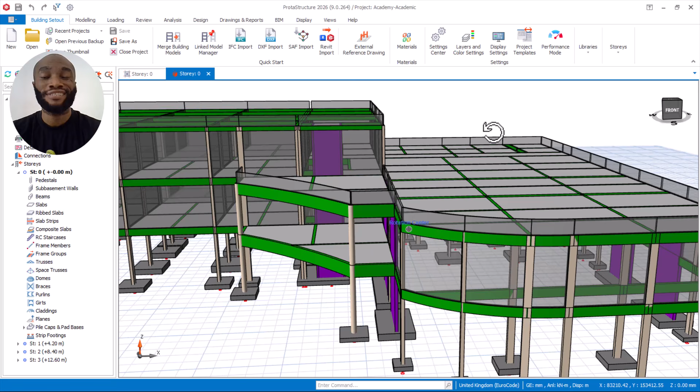Imagine being asked to design a 20-meter beam in reinforced concrete with no intermediate column. And the client and the architect don't want to use steel because of several reasons, the cost and other things. And this has to work. In this video, I'll be showing you the engineering logic, not just the software procedure, but the engineering logic behind every decision on how to design a 20-meter beam using a real-life project which I just designed here.

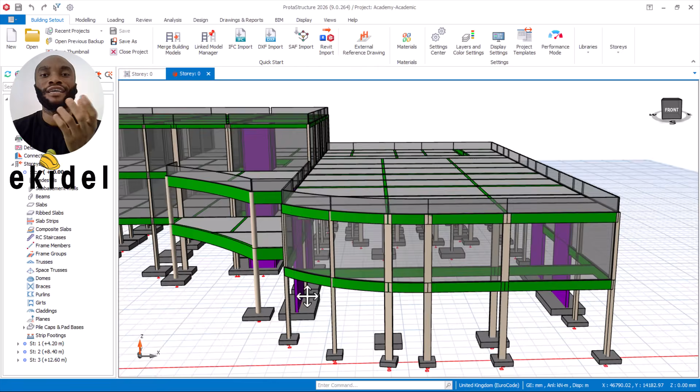My name is Engineer Justice Nwaka, and in this video, you will learn the real engineering concept to design a long span beam, just like this 20-meter beam you are seeing here on my screen. And you will also learn how to make the right engineering judgments on any kind of design in terms of long span beam or short span beam.

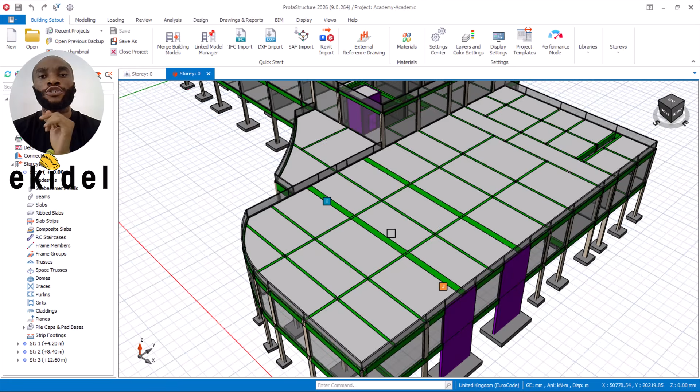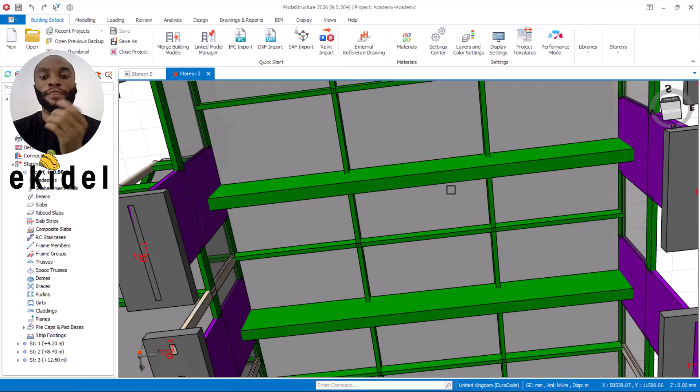And also, following this concept of a long span beam, I'll also show you the right decision for a long span beam of this, either to use a column or a shear wall at the ends of the beam. As you can see, there are two beams of 20.30 meters that I have here. It's a very long span beam without any column at the center or intermediate. And you can see that I used a wall at the ends, which you will know by the end of this video why you must not use a column when you are designing for a long span beam. Instead, it is best to use a shear wall.

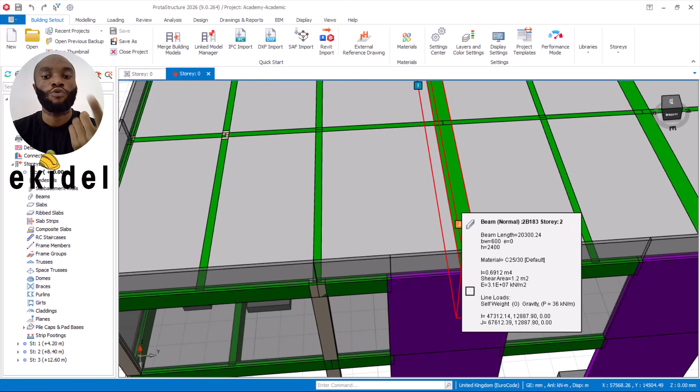Also in this video, I'll show you how the connection or the support between the long span beam and the reinforced concrete wall which you're using as the support are meant to be connected. Because if there is not enough anchorage length between this beam and the reinforced concrete wall, then there will be a split between these joints. I'll also show you the principle on what to do there. So these are the things you will be learning by the end of this video. So stick around and let us begin.

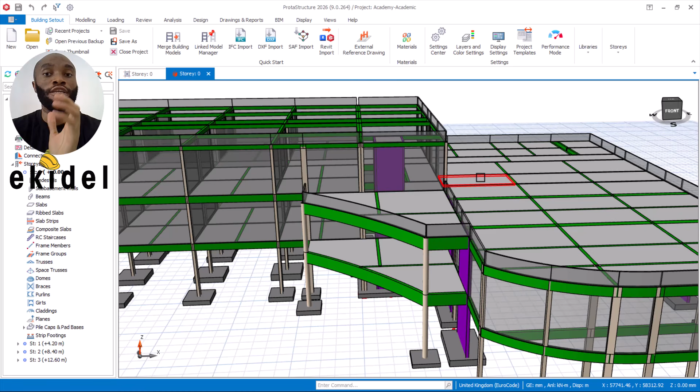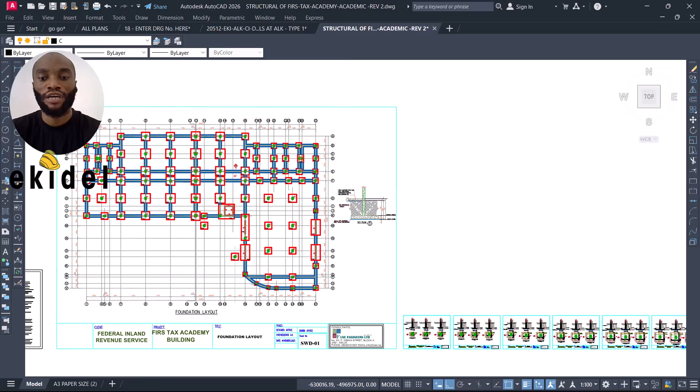Okay, so to dive into this, let me walk you back. This building has already been designed, which you can see the analysis here, and this is a real-life design, which you can see the structural detailing here. You can see the detailing of the foundation, the foundation layout. And then for the first floor, this is the first floor of the beams and column layout. And then all other ones, this is the full detailing. But let us dive back to what we have today, which is the structural design for the long span beam of 20 meters.

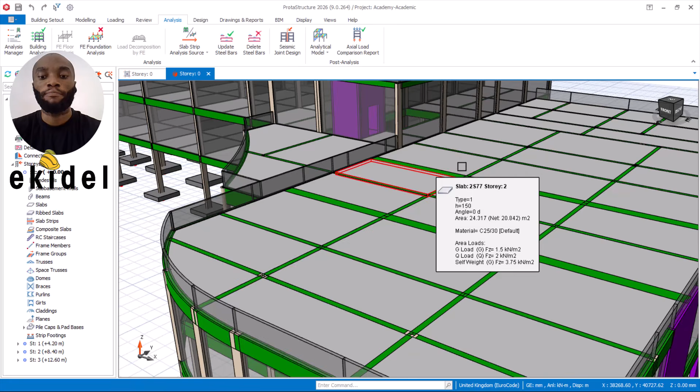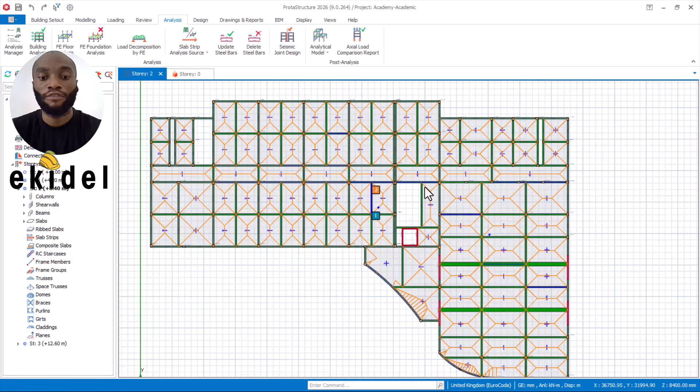Now you can see this is the place where we have the 20.0 meter and 20.3 meter beams, which you can see here. So basically this happened because the client or the architect doesn't want to have any intermediate column. It was first designed to have a column because it is a hall.

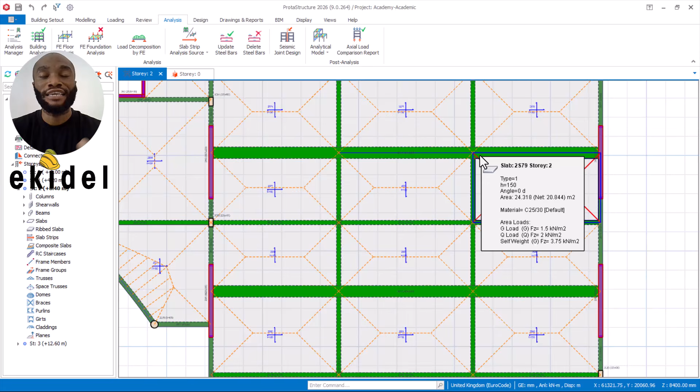This whole area is to be like a conference hall, which you can see here, an open area, and it's a double volume. The height spans through from the ground floor to the next floor up. So it's actually about 8 meters high. Yeah, 8.4 meters high, which you can see here, from the lower ground level.

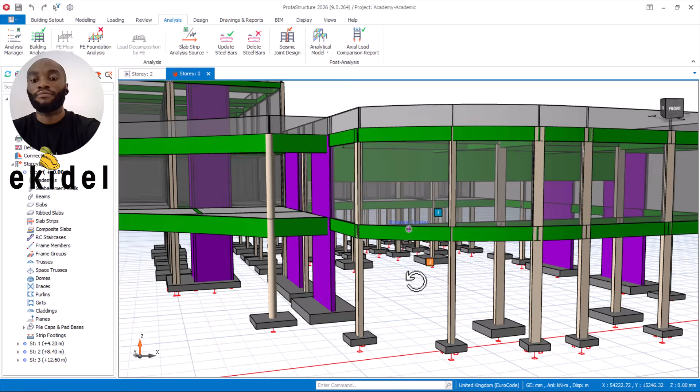So the architect and client don't want intermediate columns. And okay, so let's use steel, which they said no, they want it to be concrete, which is still workable when I looked at it, even if the span is 20 meters. Okay, that is fine. So in that case, I modeled the 20-meter beam.

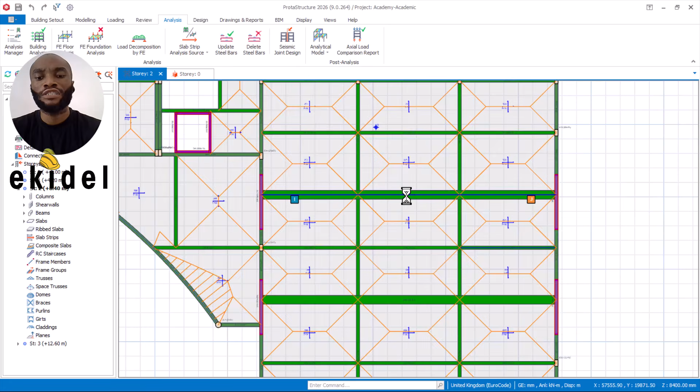Now, what is the concept of modeling the 20-meter beam? Because of the span, what should come to your mind? What will be my section? As you can see, in this case, we are open here now. You can see that I used the beam section size to be width 600 and the

depth 2.4 meters. If I open up this property now, come here and then open up the property here, it shows up just here. Now you can see that the width of my beam is 600 and the depth of my beam is 2.4 meters. Okay,

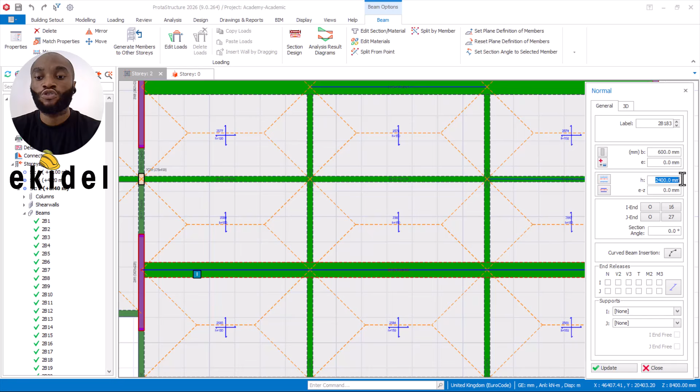and I didn't release the moment. I made it fixed, because I needed the joint to be very rigid and not flexible. Okay, that is fine. So in that case, I didn't apply hinge or pin ends at the ends of the beams. Okay, that is fine. So this is the depth.

Now, based on this depth, how do you assume your depth, or do you just choose any depth you want? No, you don't just choose any depth that you want. First, you have to follow the rule of thumb when it comes to beam depth. And what's the rule of thumb for the beam depth? Let me just close this other one here first. So the rule of thumb for the beam depth is very simple.

Span, that's L over 12 or L over 15. That gives you a guide on how to assume the depth of your beam. Now, note that this thumb rule only gives you the depth based on the span and not based on the load. So if I do L over 12 or L over 15, that gives me what? That gives me 20,300. That's the span of the beam, which is L, divided by 12.

That gives me almost 1.7 meters depth of beam. If I do L over 15, that is 20,300 all over 15. This is the thumb rule. That gives me almost 1.4. So that means that my depth of beam, based on the thumb rule, is meant to be assumed 1.4 to 1.7 approximately. Okay, that is fine.

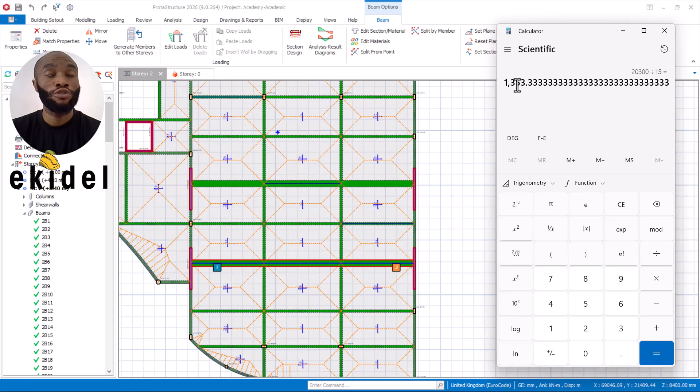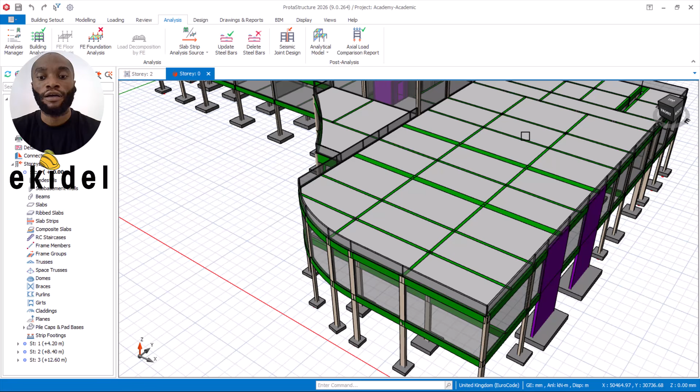Now these values are based on what? Based on the thumb rule, without the loading. Now, if you notice, we have a slab here. The top of the slab here is to be used for a restaurant. So by the time you factor all the loads of this area of the slab and everything, that is why my depth of beam changed from 1.7, which was the assumed depth, to

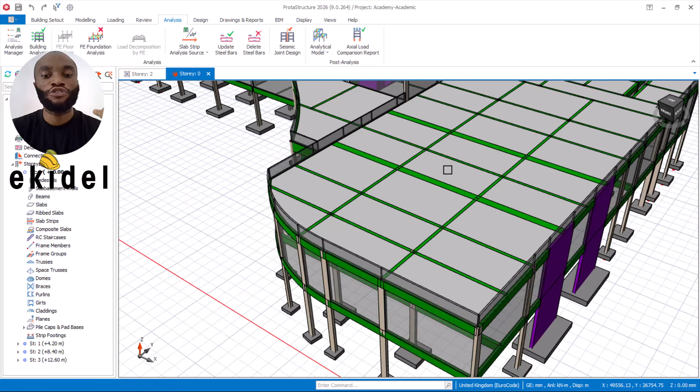2.4 meters. Now, note that depth of beam of L over 12 or L over 15 is not your actual depth. That's only a thumb rule. What governs is after your design: what is the depth that satisfies the design? So in this case, 2.4 depth satisfies the design.

Now, why did I use 600 as the width of my beam? If you open here, you can see I used 600 as my beam width. I used this because, knowing that this is a long span beam, the number of reinforcement bars to expect will be much. They won't be, let me say, 4T25 or 4T16 order. I'll be expecting something like 6 to 7 to even 10 to 11 T25.

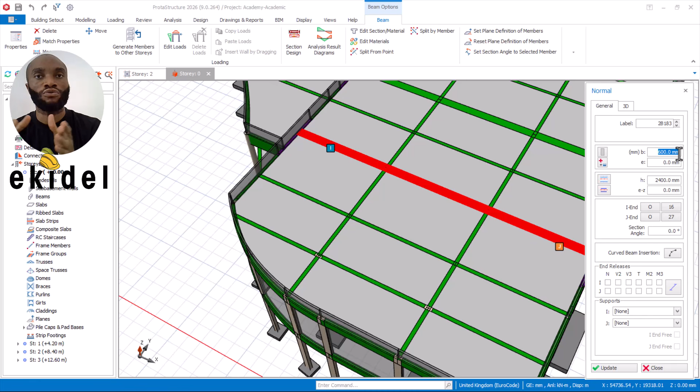So in that case, I need enough width so that those bars will not be clustered together like this. They won't be clustered; they should be spaced. Else, if they are clustered, concrete cannot pass through when they are casting it. So if concrete cannot pass through when they are casting it, after casting, under the beam will be left with void.

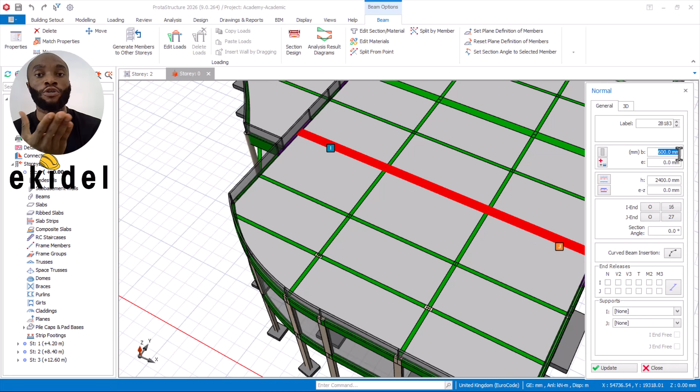And when there is void, there will be what? Air. And when there is air, there is what? Oxygen. And when there is oxygen, what happens? It will cause rusting to the reinforcement over time. It can take 5 years, 10 years, but it will rust because there is oxygen present inside the beam, because of the void. So just to avoid that issue, I have to give enough width of the beam.

Okay, that is fine. Then let's now proceed, because I've already done the structural analysis, which I believe you already know how to model if you've been with us on the channel. The same way you model your building, just model using the same principle. Now if you move to the beam design for this, if I open this one and then open the section design, we first go to the shear force and the moment value, which we displayed just now.

Now, this is the final rebar arrangement that we used for the real life construction of it. Before we look at this, let us look at the shear force and BM diagram. So we open here, and you will see the massive value over 6,000 kilonewton-meter for the bending moment. Sorry, bending moment value.

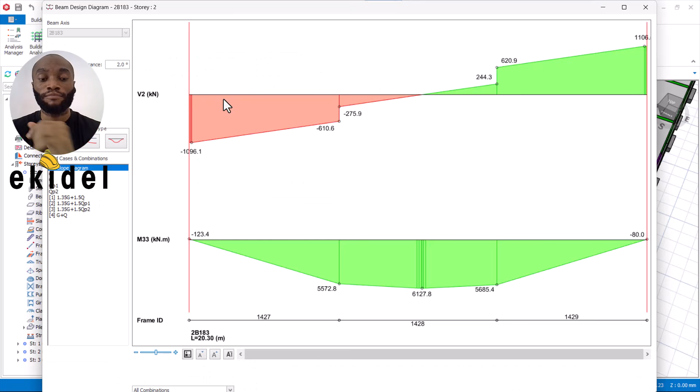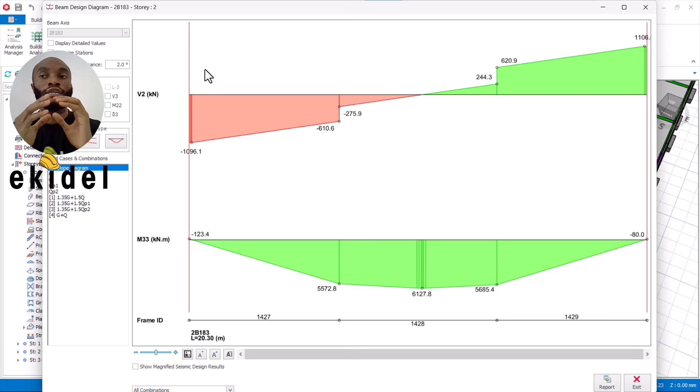Now this is the shear force here at the top, which takes care of the links. It tells you the links you're going to provide, so that there won't be any bursting of the beam. Else, if the ties, the links or the stirrups are not sufficient, it will burst. Understand? So this shear force gives you the links. Now this is the BM diagram, as you can see.

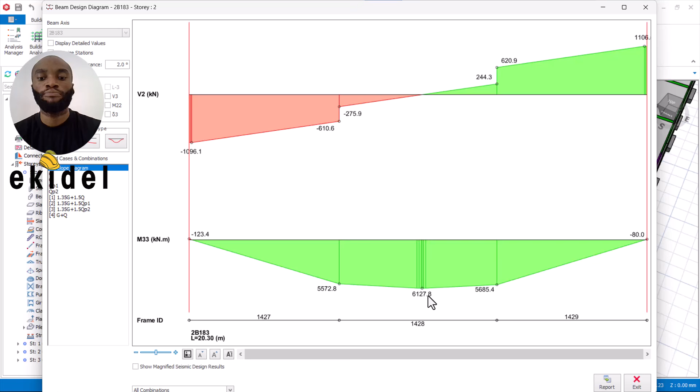Now you can see the moment at the supports at the ends, this and then this. And then you can see the maximum moment, which is at the span, 6,127.8 kilonewton-meter. So this is a very high moment, and it is what one should expect for a long span beam of 20 meters. Okay, that is fine.

Now coming to the reinforcement arrangement, you can see the reinforcement that I used, 25 millimeter. So at the top 5T25, although this will be justified based on your design. For example, if I reduce this down to 4, you can see that it is failing. So I'll increase to what is sufficient, in this case 5. I don't want to use lower reinforcement.

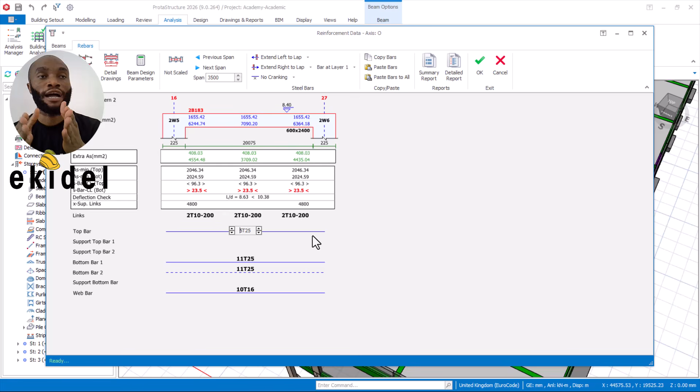Now, one simple trick: when you have a long span beam, don't use lower diameters of reinforcement. Once your beam span is from 8 meters and above, or from 9 meters and above, don't use smaller diameters like 16 diameter, 20. Even if it's okay, don't use it. Instead, change it to 25 diameter. Use fewer bars of 25 instead of using so many lower diameters of 16 and 20.

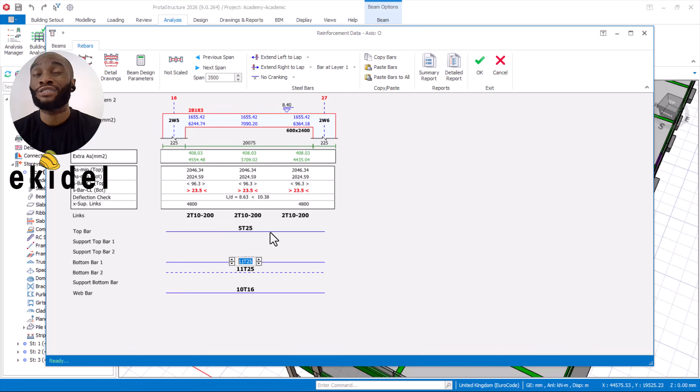Because of the length and the deflection, and you know that if a bar has a smaller diameter, it will deflect more compared to one that has a bigger diameter. So I use 25. I don't want to use 32 diameter because of the cost, because even when designing, you also consider the cost. So since this 25 is okay, I make my minimum 25 for every long span beam from 10 meters, 13 meters, 14 meters and above. Now, you can see the bottom reinforcement.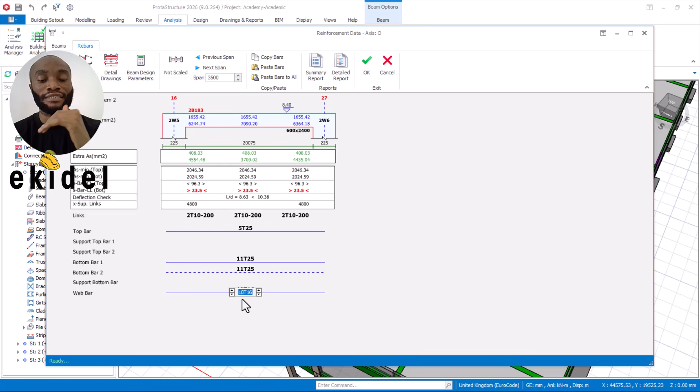I have 11 T25 on the main bottom reinforcement, and then again I also have 11 for bottom layer 2, which I'll show you on the reinforcement how this is being placed. Okay, that is fine. This is the link. This now is called the sidebar. That's the web. It's called the sidebar. Because of the depth of 2.4 meters, there should be sidebars. So 10 numbers of sidebars needed.

Okay, that is fine. Now this is a link. Because of the high shear force value, one leg of link is no longer sufficient, so it will be a doubled link. No more one leg, it will be a doubled link. So you can see now it has doubled links. If you reduce that, it's going to cause an issue of failure, but you just make it to be 2 because of the doubled link. So I put double link.

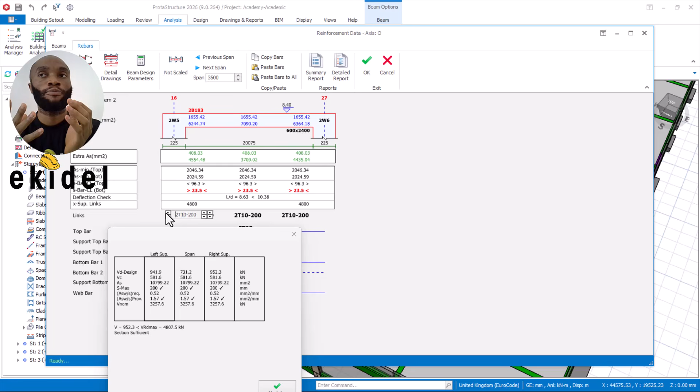Most times there are some beams that will require 3, because when you give fewer links, what happens if it's not sufficient? It will burst. It will sway and burst. That's fine. So in that case, also control your spacing. Always control your spacing, knowing that the maximum link spacing is 300, but don't always go to that 300.

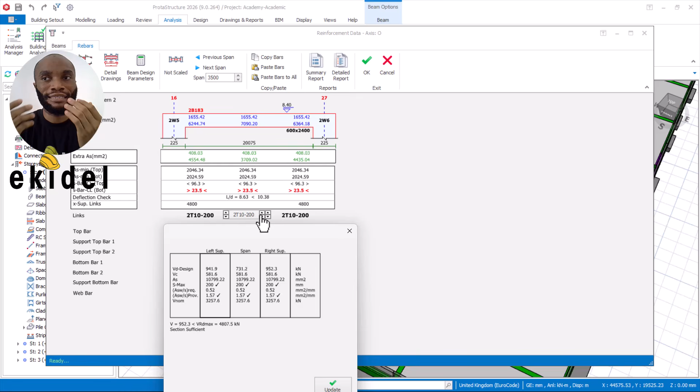Control yourself at 250 and below, because in Africa, most times the people that measure those spacings, you might give them 250, they'll be giving you 270. So if you give them 300, which is the maximum spacing, they will be giving you 310, 320, and most times the engineer on site might have too many beams to check and just overlook it. Although this kind of beam is very critical, so there must be a critical check, but even in that, still keep the principle: don't use the maximum, which is 300, try to come back to 200, 250.

So that if you give them 200, even if the design was okay for 300 spacing, and you give them 200 or 250, most times they might give you 270, 230, which is still within the safe zone, right? Not more than the maximum link spacing. That's fine. So I use mine to be 200. Okay, that's my own culture.

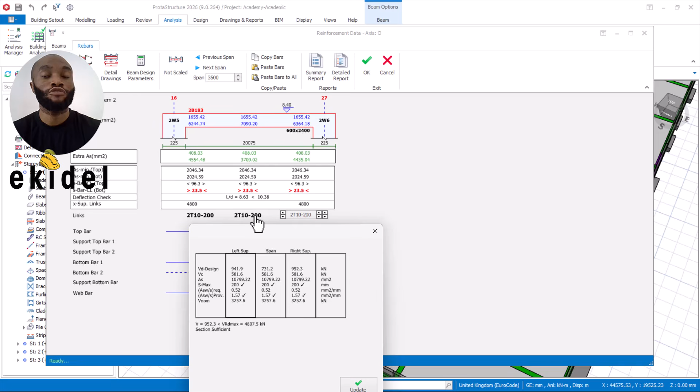Because when you're doing your engineering judgment, you also think of how the people at site will behave, knowing that in Nigeria most times you will design, but they won't call you. In fact, in Africa as a whole, you are the engineer that did the design, but they won't call you for the construction. They'll go and pick up their uncle, who is not even engineering inclined, but because he's been building houses for many years, they'll call him.

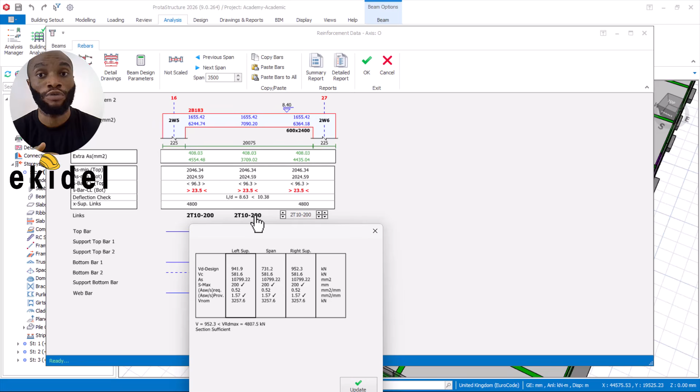So you understand? So you also consider those kinds of issues, because if failure happens, the first person they will call is the engineer. Even if you are going to win the case at the court using your design report and everything, what the public will know is that this engineer doesn't know what he's doing, and that dents your image. So you have to make sure you do your engineering judgment based on these things.

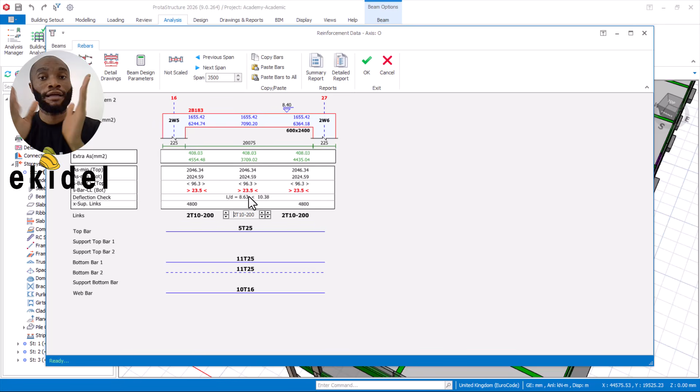Okay, that is fine. So this other one that is showing, I've already explained that this is just the spacing between the reinforcement where the concrete passes through. So as long as the value here is more than 20, you are safe, because the maximum aggregate size, that's chippings, the stone size for casting, is 20 millimeter. Since this value is more than 20, it is safe. I can see the L/D is 8 against 10 point something. It's okay, it's not failing.

So now you can say, okay, let's go diving into the detailing aspect. The same principle I applied for this beam, I also applied for the other 20 meter beam here, because they have the same span. So coming back now to the structural detailing, I'll first of all zoom in to this place where we have the detailed drawing.

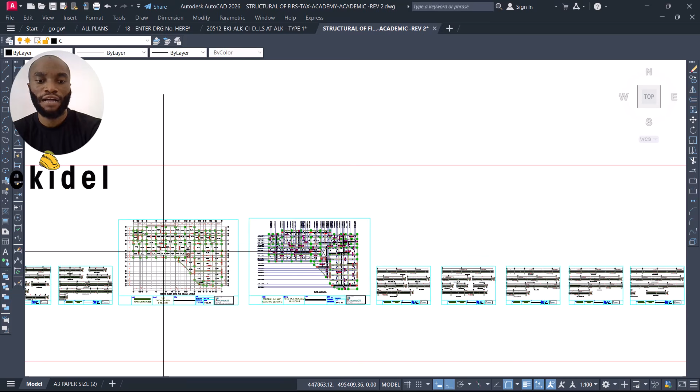So you can see the 20 meter beam here. You can see that 600 by what? By 2400. Yeah, correct. Let's now go back to where I said for the support. Yes, I said I will explain that too. So back to here now. You can see that I used shear wall instead of column for the supports.

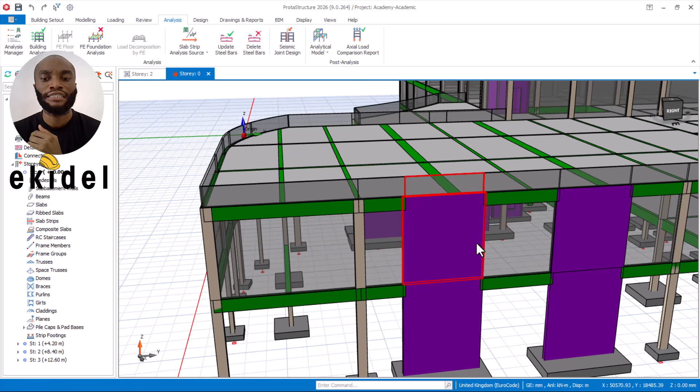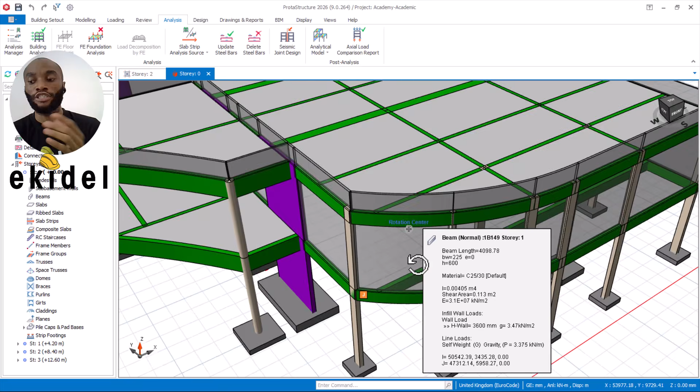Now, what was the reason why I decided to use shear wall as a support? You can see that every other beam is carried by columns, which here too would have been carried by columns. But the reason why I use shear wall for the supports of this long span beam is because generally, when you're designing, you don't look out only for the aesthetics, you also look out for the system. By system, I mean the framing system. So in general, an RC wall is stiffer compared to a column.

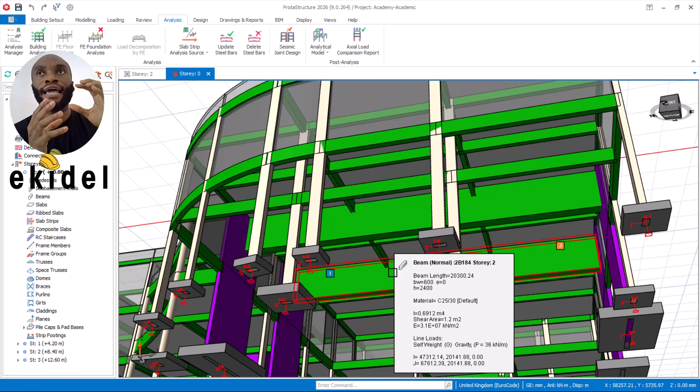So when you're designing for a bogus structure or a capacity design, in this case these two beams are called capacity design because of their longer spans. Capacity designs are like high-rise buildings that will resist earthquake, buildings that will resist high wind effects like hurricanes. Those kinds of designs are capacity designs. Then also long span beams that are unimaginable to do. Those are classified as what? Capacity design.

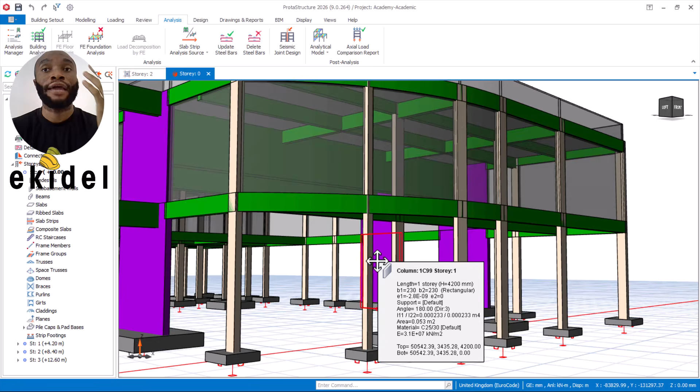So when you're doing that, you should consider that your framing should also come into play. Knowing that your vertical members can either be a column or an RC wall, that's a reinforced wall, one has more strength than the other. An RC wall is stiffer than a reinforced concrete column. That is why in all high-rise buildings, for buildings meant to resist earthquake, vertical members are always preferred as RC walls rather than columns, because an RC wall is stiffer and resists more earthquake than columns.

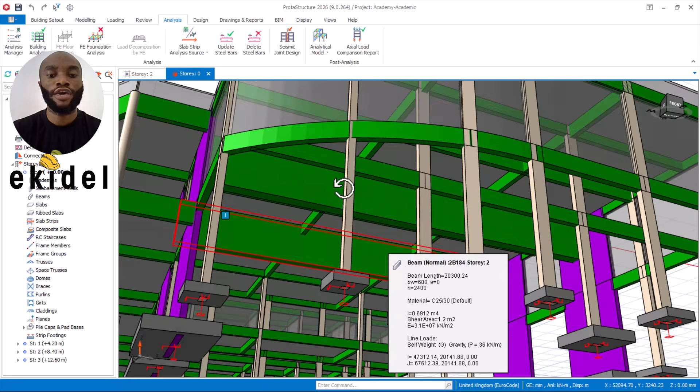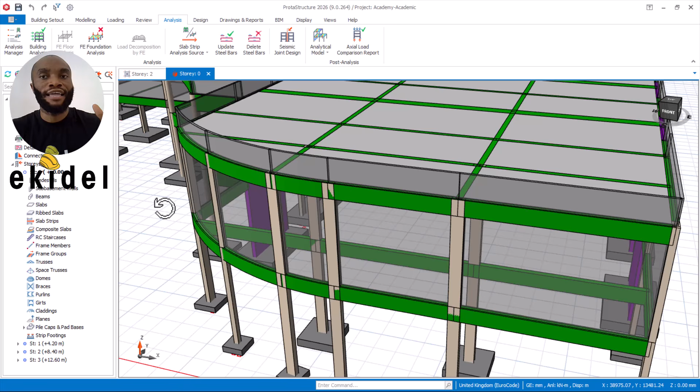So the same way here, I chose to use this because of the high moment coming from this beam. We are rating over 6,000 moments, kilonewton meter coming here, which is a very high moment coming to the ends. So using the column, even if the column will work, it will be a bigger size. And when a column begins to extend more than 1 meter in length, it begins to behave like a wall. So instead of that, why not change to a reinforced concrete wall? Because using the column for this will make your column bigger, either in length or in width.

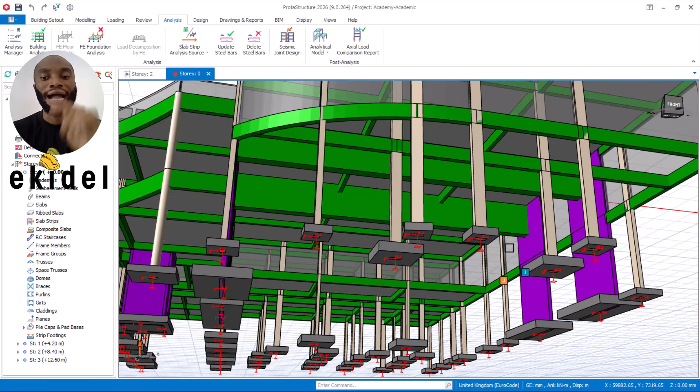And so since an RC wall resists more load compared to a column, I have to use an RC wall because this is a capacity design. So that's why I made that judgment of using an RC wall, which shows the size that is sufficient to carry the load. Okay, so that takes us back now to our detailing again. So back to here now again.

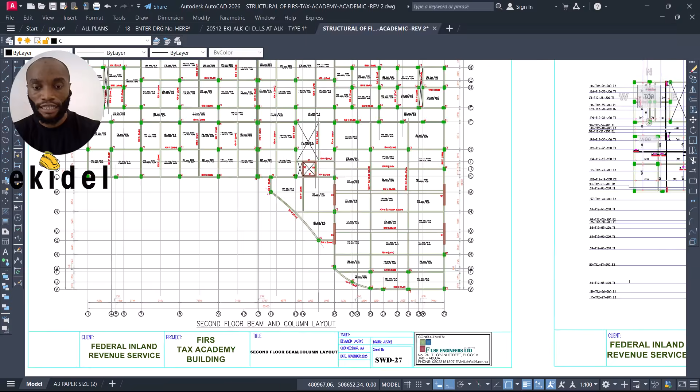You can now see it here. These are the beams. Can you see that? This is the 20-meter beam, and you can see the section size there. So this is the beam spanning from column to column, and then supporting or carrying the other beams here. You can also see that one here. But let's now move on to the structural detailing for this beam section. So this is the slab within that area. Then let's go to the beam.

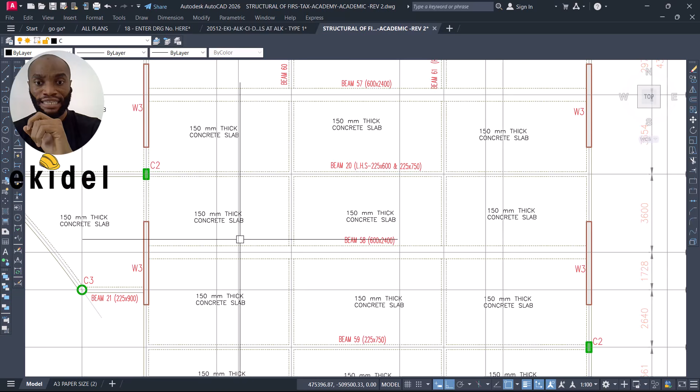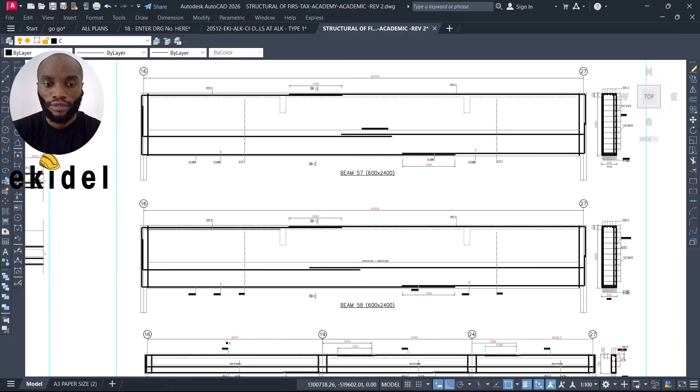So these are the two beams, this is the first one and this is the second one, beam 58 and beam 57. Can you see that? Now you can also see the reinforcement here. You can see the first one 6T25, and then the other two 6T25. But what you saw was 5, right? Because when I did the main design, I used 6 instead of 5, and I had my reason for using 6 instead of 5. Then at the bottom, you can see the bottom here 11T25, B1 and B2.

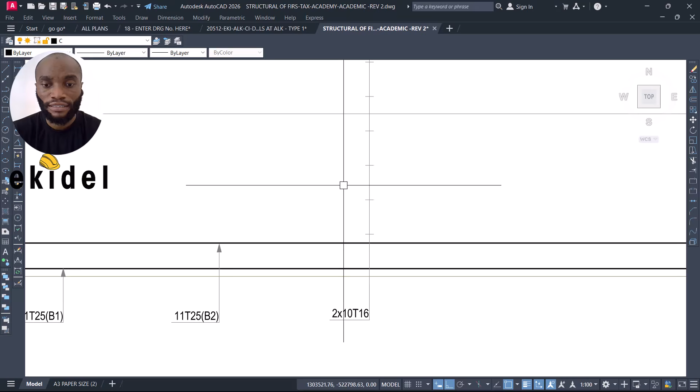So you can see the B2 here. This is the same thing that we saw, 11T25. Can you see that? And then for the sidebars, you can see 2 times, that is on both faces. You have 10T16 on this face of the beam and the other face of the beam. Correct? That's fine. Then you can also see now this is the top and this is the slab.

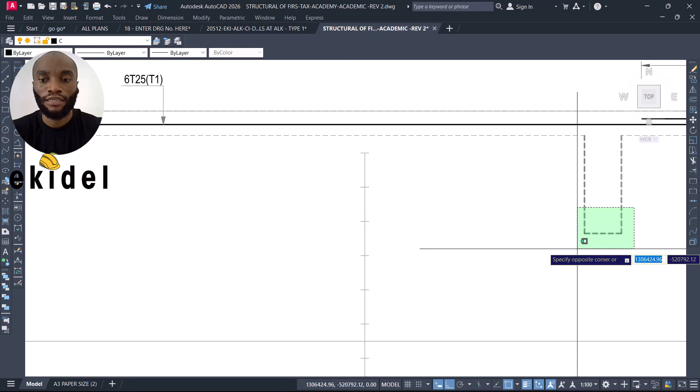This is showing you the slab line of 150, and then these are the beams that we are coming to connect on these beams. So these are like the trace plan. So the top bar, knowing that this is a long span beam of 20 meters and the maximum length of our reinforcement was 12 meters. That's what you can see in the market.

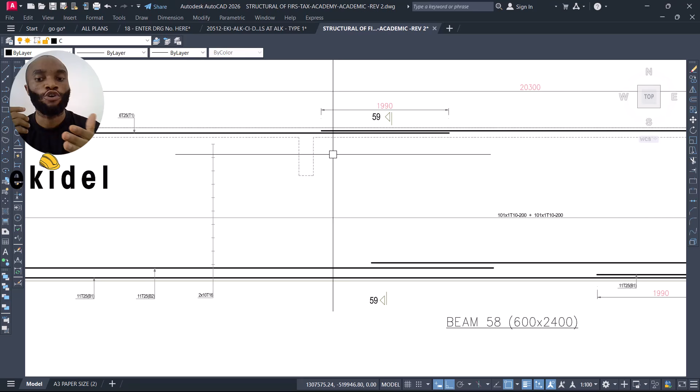So the next thing that you will face is how to lap your reinforcement, lapping. And the best way of lapping is to stagger your reinforcements. Always stagger your reinforcement in different areas. So how do you stagger your reinforcement knowing that the length of the beam is 20 meters, more than 12 meters? You must not lap your top reinforcement and your bottom reinforcement at the same location, else they will create a weak joint on the lapping. Most times your lap might fail.

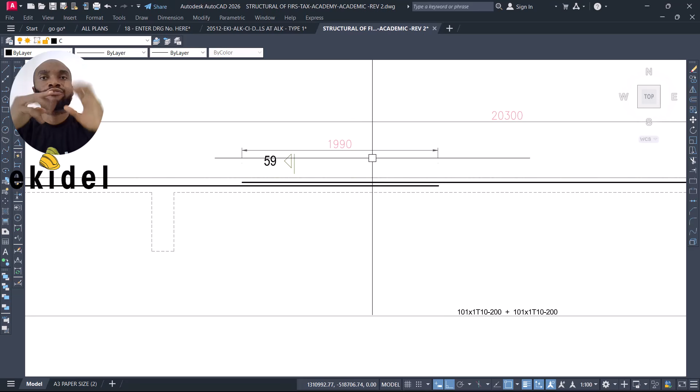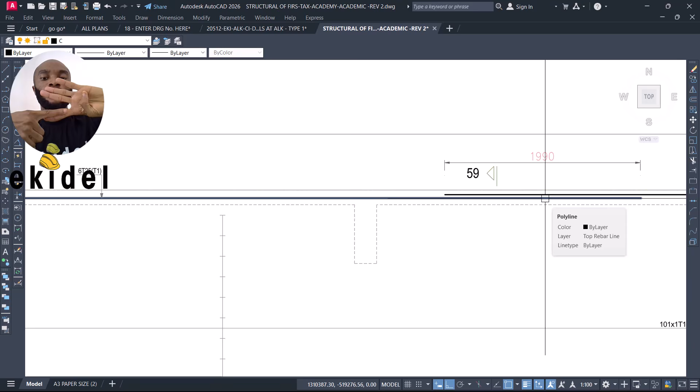And knowing that we have 6 numbers of this, and this is where we are lapping it, make sure that you're not lapping all the 6 at the same spot. Let me assume that this is 6 now, but it's 4 showing, right? Don't lap all of them at the same spots. So if you lap one here, you have to give a space forward, either by 3 meters or 4 meters, and then lap the next one at the front.

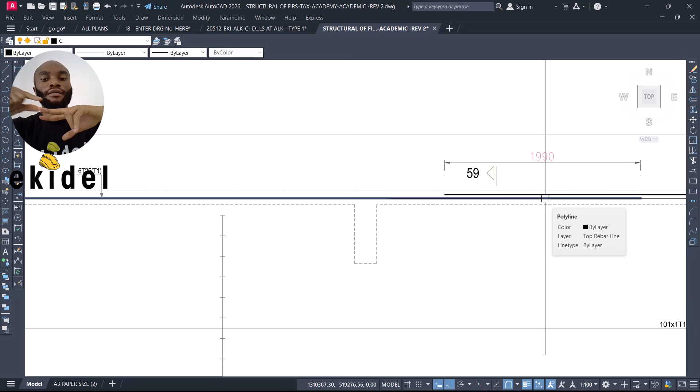Do you get? Again, the bottom, because you have 6 numbers now. So the first one here, lap it at 2 meters or 3 meters, based on the code standard, you'll see that in the code. Then this one, lap it forward, maybe backward. This one, lap it at the center. So it is called staggered lapping. You have to stagger the lappings, okay? So the same thing, where you lap the top should be different from where you lap the bottom, so that there won't be any weak point created. So that's for the lapping principle.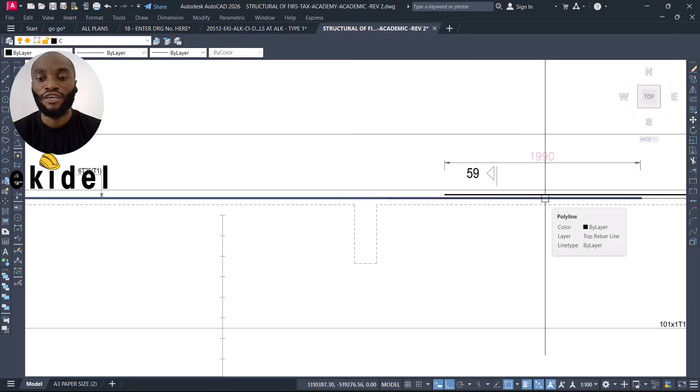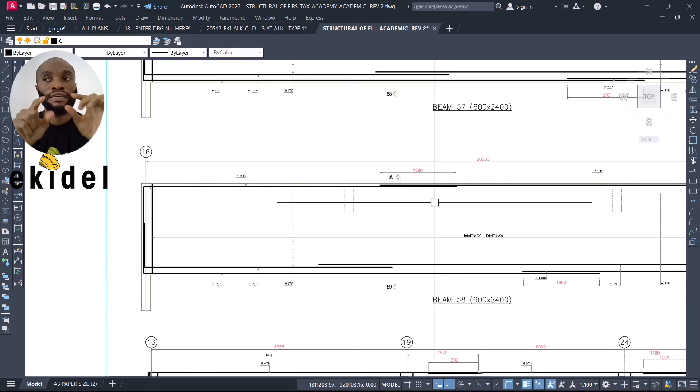I can see in my own case where the top was lapped. You can see where the bottom was lapped. It is not at the same spot. So you lap them staggeredly. And even on that same top, because you have 6 numbers of 25 at the top, lap them at different locations. And also for the bottom, you have 11 numbers. Lap them differently. You can lap 2 at the same place, the next 2 at a different place. So stagger it.

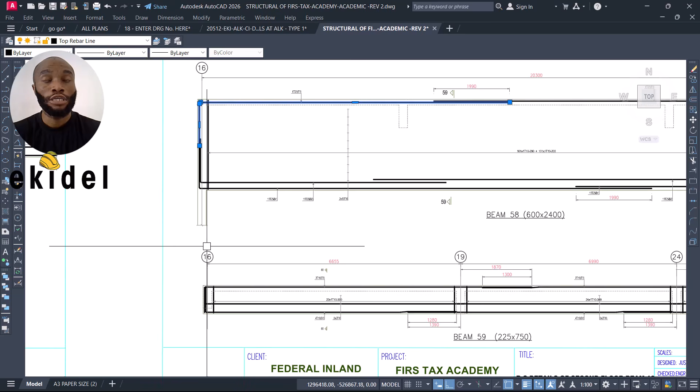Now, if you look at mine, if I put my hand here and you put your eyes there, I have 2,200. But this beam was actually scaled by 2. So what is here is around 1,100. Because if I measure this now, you can see what it is giving me.

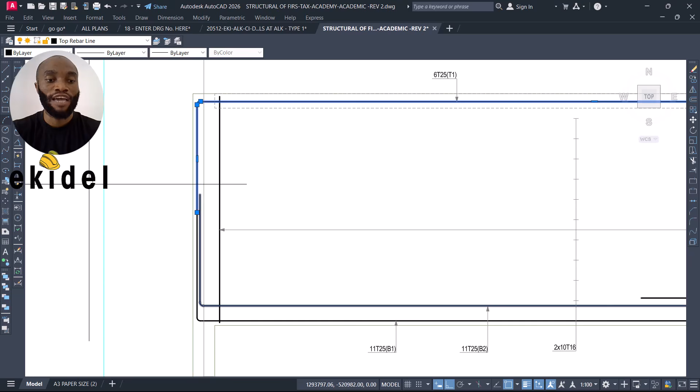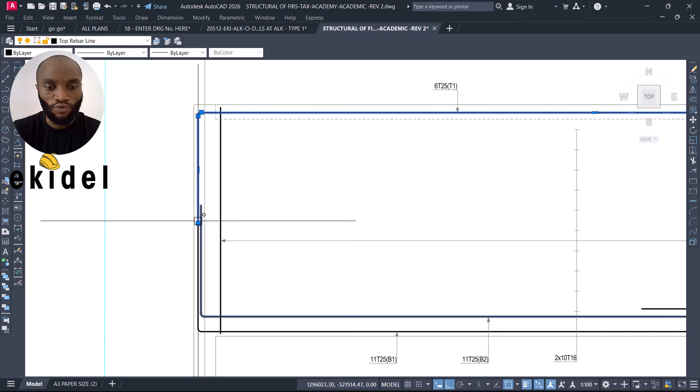It's giving me 4,800, so it is scaled by times 2. But our beam depth is 2,400, right? So you can see that any value that I get here, you just divide it by 2. That's the actual height. Okay, so in this my lapping length now, if I put my hand here, this is where the lap stops. So if I put it here, it will show me 2.23 something. So what I use as my lapping length is 1.1, okay, that's what was sufficient in most cases.

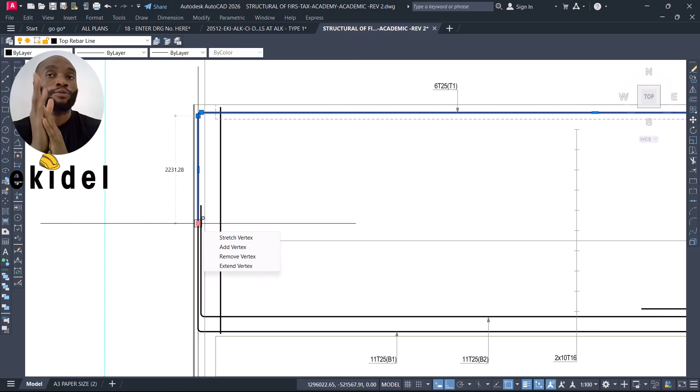In most designs, you can even go deeper into the wall just to create enough lapping length with the column reinforcement, so with the shear wall reinforcement or column reinforcement, that's fine. So you can see now how this is being done. Let me show you the section now. So this is the section, and you can see the top of the beam here is 6T25. Can you see that? And then this is the slab of 150. This is the side bar, can you see that?

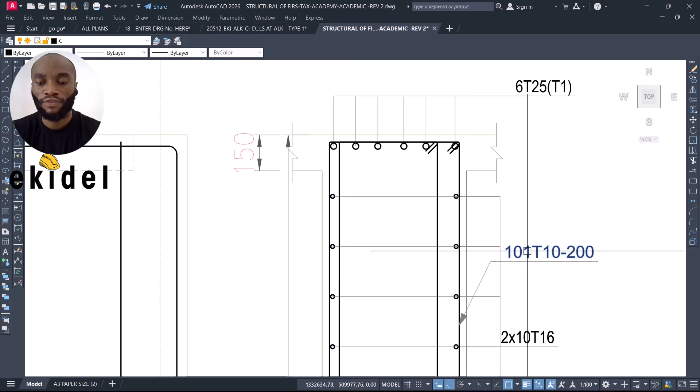T10. This is the bar mark. This 101 is the bar mark, not the number. Then you come here. You can see here too, this is 2 times T16, because it has double links. You can see that double link is there. Then my main focus now is the bottom part. You can see that this is 11 T25 first layer and second layer. This is how it is.

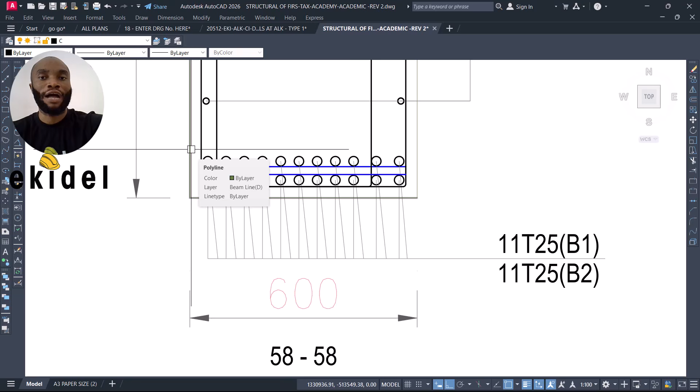So what is required is 22 numbers at the bottom, but we need to step one up as layer 2. So this is how it is being placed, even at site. They first of all place these 11, then put a spacer bar. This spacer bar must be the same diameter, that's T25 in this case, which they will cut before they place the other 11 at the top.

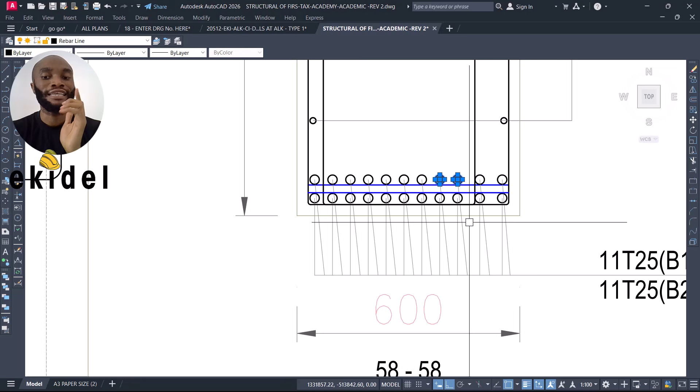Now note, these values are not custom values. This was based on my design. In your own case, it can be lower or it can be higher. And these depths are not custom depths for every 20 meter beam. Note that. This is based on my design, loading, and the span. Okay, so you can now see how this is being designed. See you guys on the next video.